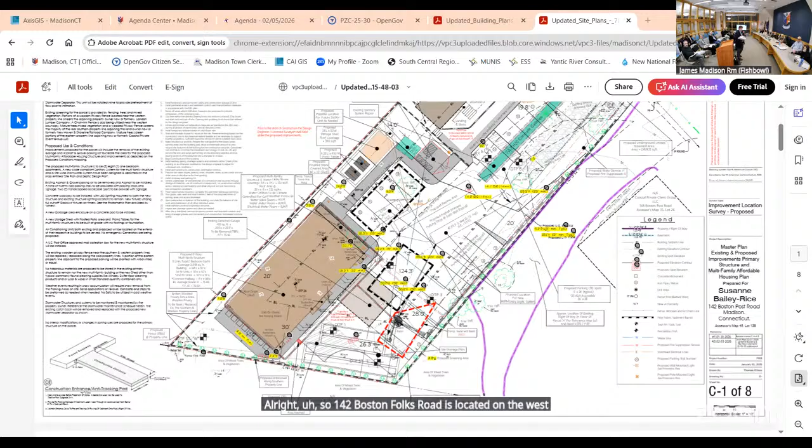All right, so 142 Boston Post Road is located on the west side of town, south side of Route 1, over near Nathan's Lane. It's bounded on the north by the Post Road, on the south by the railroad line, on the west by Land and Lumber, and on the east by another property, I forget, 148 Boston Post Road, which appears to be a commercial property. I couldn't tell if it's mixed use.

It's presently improved with an existing building here that contains a learning center operated by the applicants, and it has a 620 square foot apartment upstairs. So it's a mixed use building. There's also an existing garage on the property in the rear.

The proposal under Connecticut General Statutes 8-30G is to construct an additional building in the rear of the property with 4,500 square feet that will contain 8 new one-bedroom units.

Since the application falls under 8-30G, it requires an affordability component. So including the existing 620 square foot unit in the front building, there will be a total of 9 units. With 9 units, they're required to designate 3 as affordable units, and 6 will be market rate units. We can talk more about the affordability component, but we'll go through the general site plan and have Tom give you further information about septic and stormwater.

The property is served by public water and a subsurface sewage disposal system. Currently on site there are about 10 parking spaces, and that will be improved. The garage is going to be eliminated, and there's a total of 20 parking spaces proposed under your regulations and the Connecticut statutes related to parking.

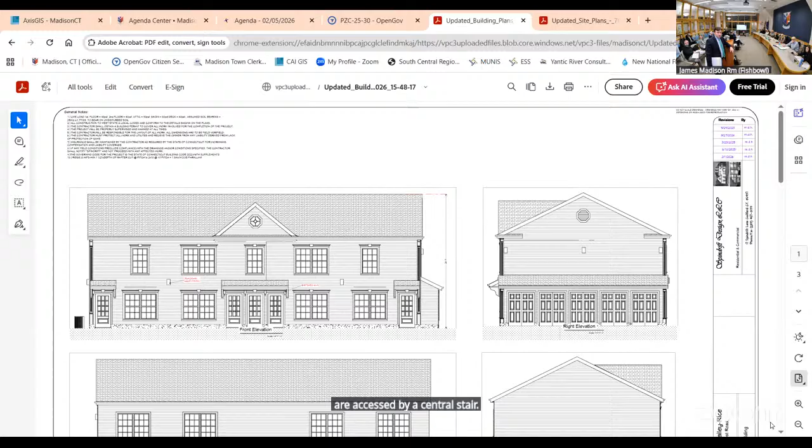So here's the proposed building. The 4 units on the first floor, 4 units on the second floor. The 4 units on the first floor each have direct access without a common hallway. The units on the second floor are accessed by a central stair, which leads to a small hallway that serves the units.

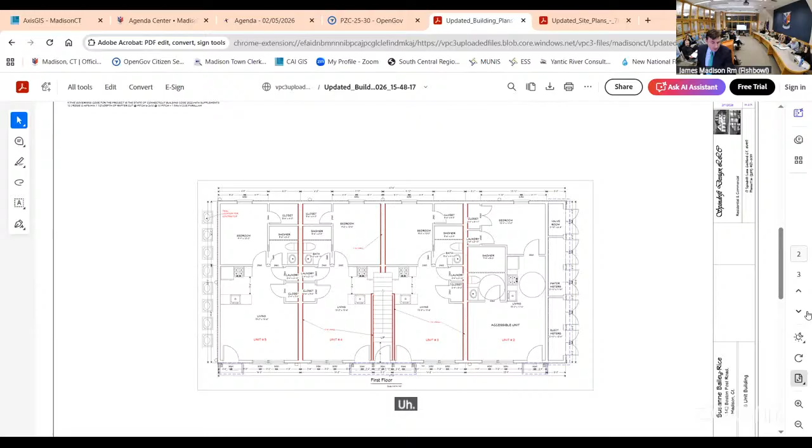Here's the first floor. You can see the 4 doors going into the units. They're 1-bedroom units. There is a designated accessible unit that has the proper circulation, and it's at grade, so it's accessible. Going up the stairs to the second floor, there's a small landing which goes into the next 4 units, all very similar size, 1-bedroom units.

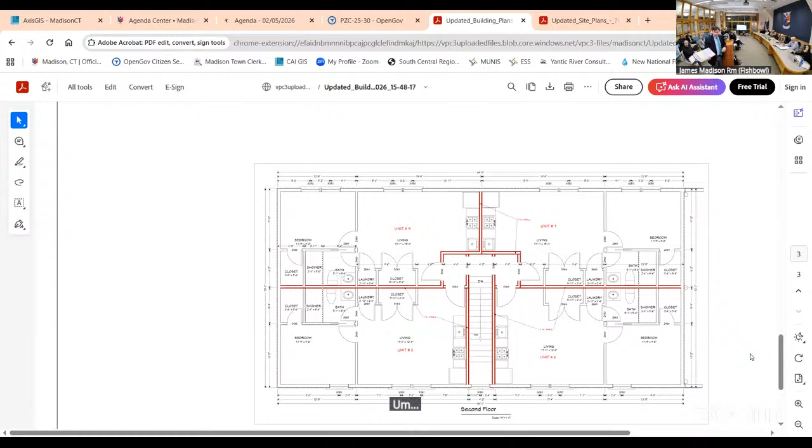On the first floor, there are designated interior spaces for the water meter, electric meters, and a valve room for the sprinkler. This building will be sprinklered. In the rear, these are the HVAC systems that will be on the south side of the building.

We also have a photometric plan. It doesn't need to be shown, but it designates that the lighting is going to be adequate to provide safety for the occupants, so that the parcel is adequately lit.

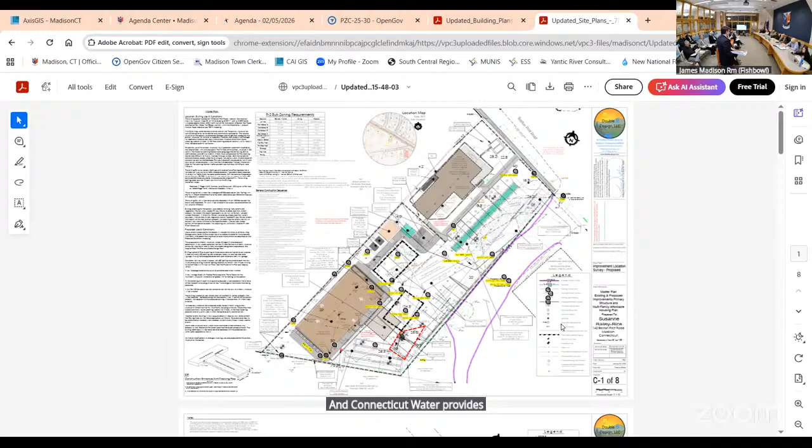We've worked with the utility companies. There are 2 utilities here: Eversource provides power, and Connecticut Water provides water to the property. The Rices have engaged both of those, heard responses, gotten feedback, and are in the back and forth about where the location of the utilities are going to be, down on the eastern side of the property. Eversource is going to require the installation of a new pole on the property, and then underground from there to a transformer. I think you guys can talk about it.

Updates as to the location of the transformer, and then Connecticut Water has also been contacted and has reviewed the site, and we don't expect any problems from a utility perspective.

I'm sorry, do you know where the pole on the property... That's part of the back and forth. Yeah, that we're still, it's not resolved yet. Yeah, correct. I can expand on it. Yeah, go ahead Tom. Tom's been involved in these discussions as everyone. Good evening.

My name is Thomas Wilcox from Double B Design. I am a draftsperson and land use technician for our company, acting as one of the agents this evening, as I've been working with our professional engineer, Thomas A. Smithens, on the project. He's also a licensed surveyor for this project in our office.

Expanding on this particular question, our back and forth with Eversource has been that the existing pole in the state right of way is there, and Eversource is at the moment suggesting or asking us to demonstrate a pole on the property. What they're doing is essentially, instead of what we would prefer - meaning underground to the property line and then a transformer - working out some of the criteria of who would be doing the underground digging in the state right of way.

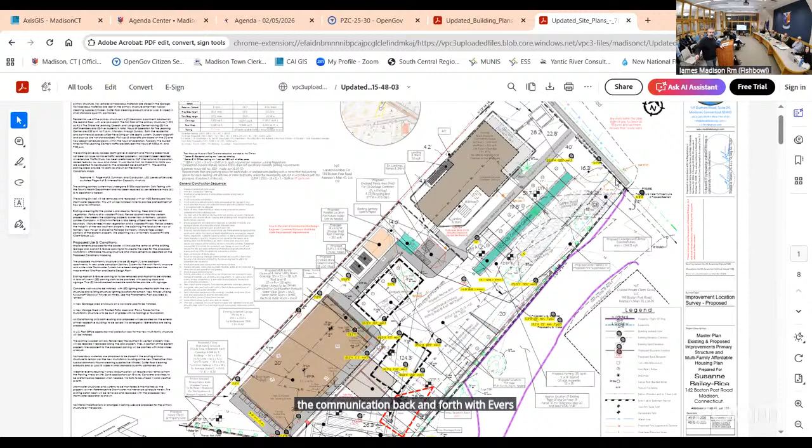It's something we don't feel is ideal, adding another utility pole. It's not something we'd like to do, but it's something we may have to do because we're working that out. The communication back and forth with Eversource is ongoing—Aaron, if I could ask you to go to page 3.

The easement would come in and follow the property line essentially, then take a right-hand 90-degree turn into the utility closet. This would be all underground from the property line to the building. Eversource is fine with that, even with the Connecticut Water two service lines, one for potable water, one for fire suppression.

The building is going to be sprinklered for fire suppression. As the easement comes over and in, it's going to be shared by those two service providers, and both have no problem with that, as long as they can get to the building with our required separating distances.

This map has our metes and bounds, one of the criteria Eversource is going to require for land use records when it goes to final approvals. So these plans, as they are, aren't approved yet, but there are no negative comments received—everything is as they want regarding showing the fire suppression and the distances of separation.

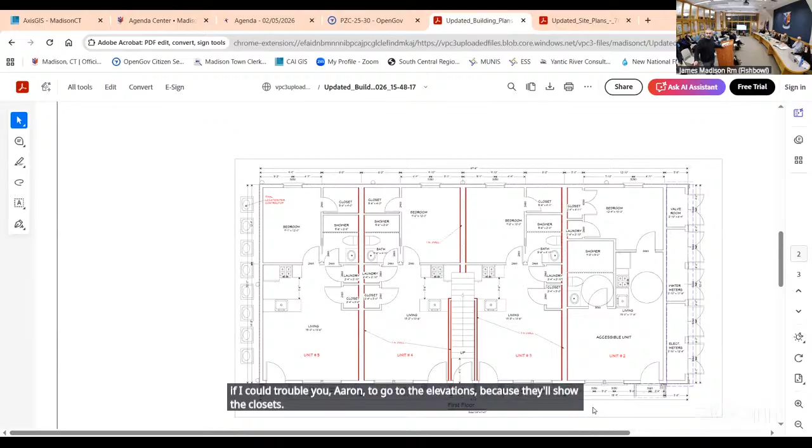The valve room is to be locked and temperature controlled. The meter room is also to be controlled, obviously for freezing protection and for sealing, with the water company only able to get in and out—so no access essentially. What happens to the existing utilities that this fine family already has in place?

They stay—the existing building stays with its own utilities. There will be a new one just for that, correct, the new building will have its own. How will the new building be heated? Electric heat, right? Yeah, yep.

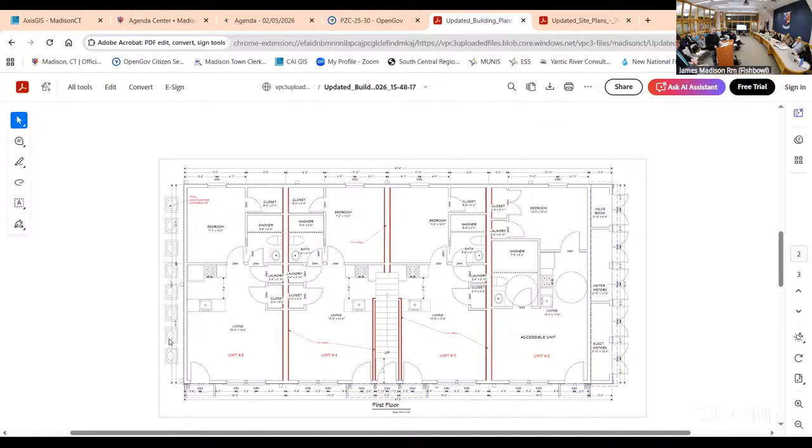And I can further expand on this. Go through your site thing. If I may, we have received comments dated 12/29/25 from a preliminary meeting that we had.

Going down just a touch on the bullets, the owners have confirmed sprinklers will be utilized.

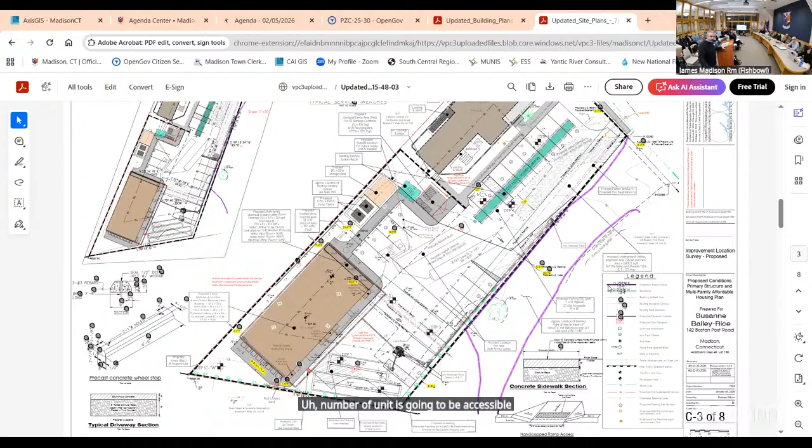The parking for ADA handicap compliance is 1 to 2%, or at least one parking spot, dependent on the number of spots. With the 10 spots we have, we're providing 2 handicap spots, one on either side. The idea being accessible, one for this unit, unit number 2 on the ground floor, which is going to be accessible and compliant for ADA. This spot could assist with any activity in the current use of the building.

Moving on, in regard to the health concerns, at the meeting we did have, at that time we did not have sanitary approval for our plans. Since then, we have obtained health approval. We received that on the 3rd, just the other day.

We addressed the comments from the health department. It is as shown here. That will be our primary leaching field. That will be our tank, and the distribution of the effluent goes through the sewer line into the tank and then to that underground product, which is H20 rated for vehicle loading. It's going to be pavement, and that's going to go into a later topic.

There were notes on the site plan for zoning and development. We did revise our floor areas, and we did update our parking calculations. That's represented on the first page in our zone chart, which has all been updated.

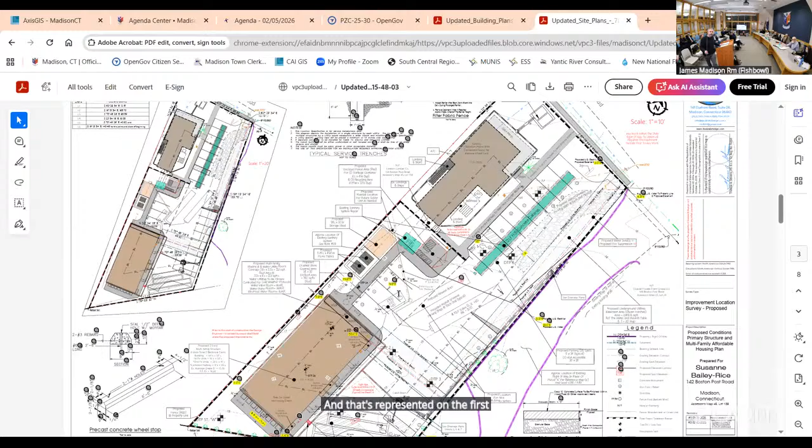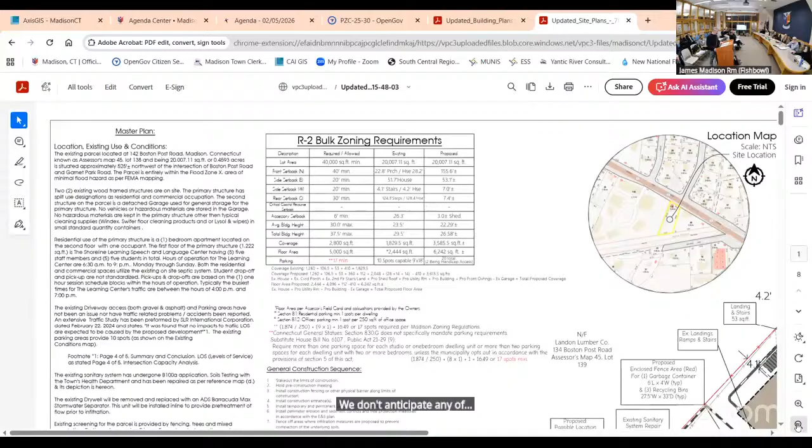We have continued our conversations with the utility providers. They're both going well with no negative comments received. We don't anticipate any negative or adverse timelines, just a matter of completing that.

The gravel driveway that was previously proposed, we have switched to bituminous asphalt pavement. As you come in, park on either of the parking spots here and move down into this parking lot, which will then lead you onto that concrete sidewalk.

It's an impervious surface. We had done calculations for the entire site based on the entire site being impervious. And we designed a subsurface stormwater collection using both a catch basin and stormwater collection for the roof systems. We've also provided the existing structure with its own stormwater collection to grab all of the roof water and bring that into collection to assist with any potential adverse conditions.

The way that the lot slopes, we're doing minimum contours. We want to leave the natural drainage patterns as best as they are. We have excellent soils, even though we're adding an impervious surface. The way everything is going to be sloped and finally paved out, we're going to be able to collect all the stormwater. We're actually above the requirements, on I believe page 5, possibly 6, where we have our mathematics for the stormwater system.

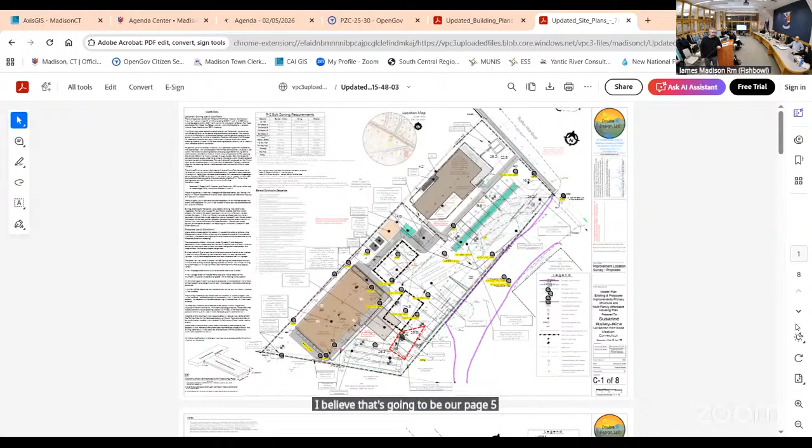Both for the existing unit, we have calculations for the requirement and what we provide, and we are over what would be the minimum. The same on our stormwater sizing, where we would need I believe 1,487 cubic feet of storage, and we're at 1,893 cubic feet of capability. So we're meeting our mark on that.

There wasn't. Go ahead. Absolutely, please do. Where do these calculations come from, and can you speak to treatment as well?

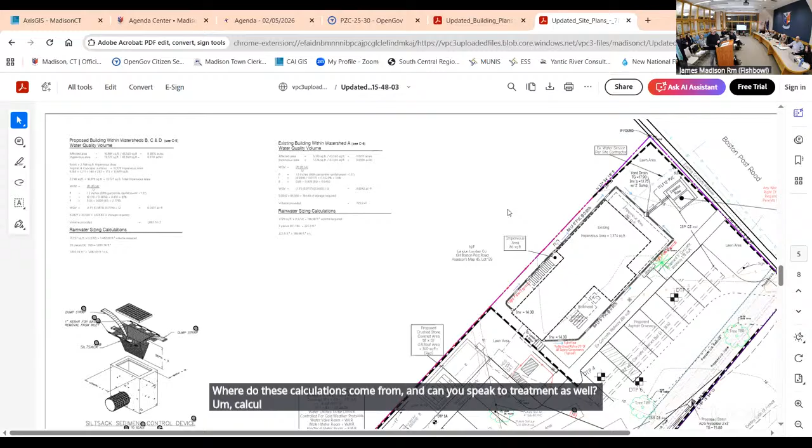Calculations, to my knowledge, are coming from the water quality requirements for our current standards for stormwater. And for treatment, it is subsurface. We're collecting the suspended solids, and what the suspended solids will be doing is they'll be retained.

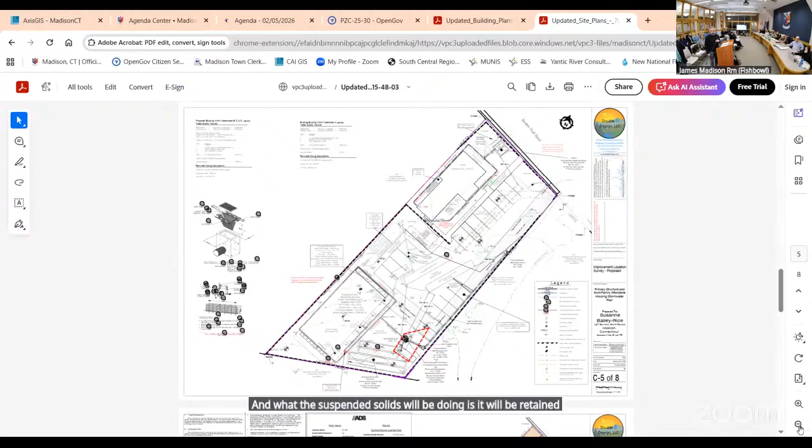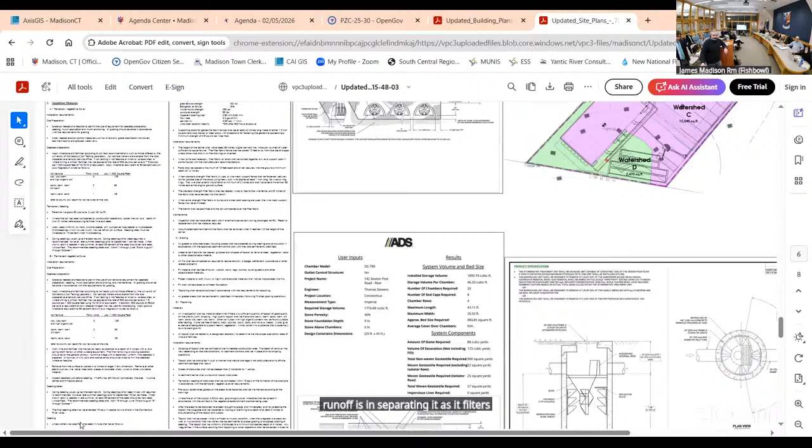If you could move to the next page please, Aaron. So that's the hydrodynamic separator. This unit is going to be collecting runoff and separating it as it filters it out. It's on the bottom of the unit, it's capable of basically a sump.

Solid particles will be able to go to the bottom. It can be vacuumed clean for periodic maintenance, yearly maintenance, just for the longevity and viability of the product and the property.

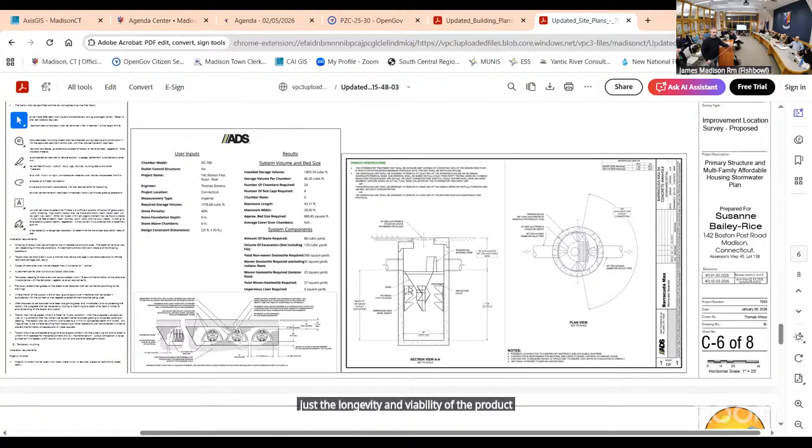These stormwater systems don't separate through cyclonic motion, they separate through sumps as the water would come in. Heavier materials would sink to the bottom, and then the water would flow into the chambers and be retained to allow the ground to slowly absorb that. We've got excellent soils where we are. Again, for the size of the unit and the requirements of the commercial aspect of the multifamily setup, we hit those markers. We're fine for separating distances from the stormwater.

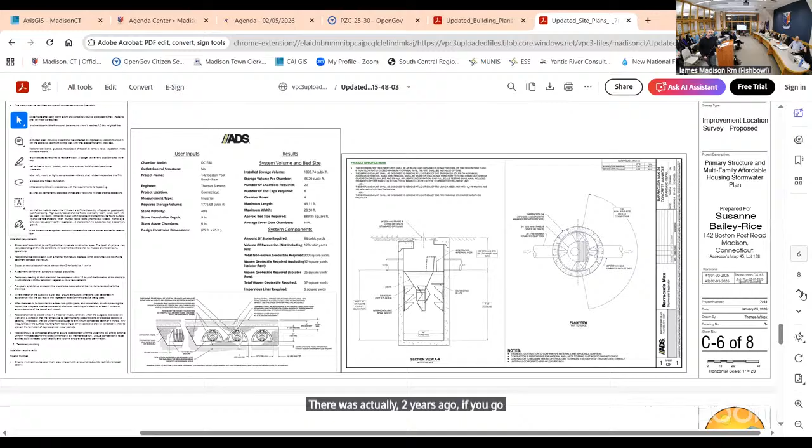There was actually, two years ago, if you go to the second page please, Eric, page number 2 - the existing building, this leaching field and H20 tank was installed about 2 years ago, and it was a full system replacement, and there were no issues. There have been no issues, everything's been going extremely well. So I would say that's a great litmus test for this site, the size of that system and the conditions that it's currently in.

Moving to, we've touched on the photometric plan.

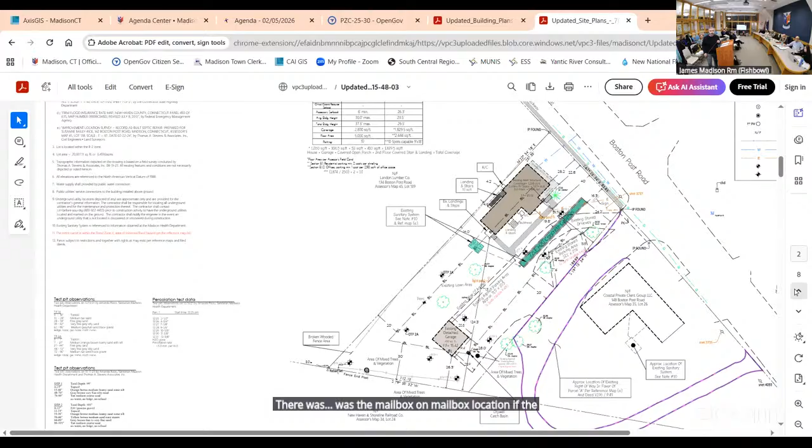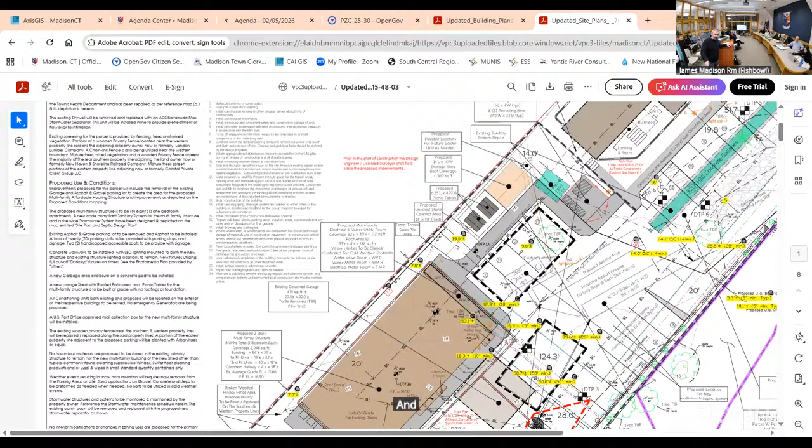There was a mailbox location, if you could go to the first page, please, Aaron. It's going to be, if you could please slide over, in the lower portion. Keep going, there you go. This red box is essentially the location.

The postmaster, to the best of my knowledge, has discussed with our clients that there are several opportune spots they can put it, based on proximity to the building and location for the postal service provider to drop off the mail. This area is going to be a no parking zone, ideal for a postal worker to drive in, park, and distribute the mail in that pedestal cubicle kiosk for the 8 units.

Our first floor elevation is going to be elevation 16.50. That was one of the things we were asked to show. So I've put a call out on the building there, and that particular call out will correspond with the building plans.

We did provide some more spot elevations regarding the topography of the property, just to show and reiterate how the contours are already naturally moving towards this southern adjoiner. Currently within this area is all mixed vegetation and trees and things of that nature. Any catchment from this catch basin is going to be ideal as this flow happens. Any flow from our property is going to be negligible, no different than what currently exists.

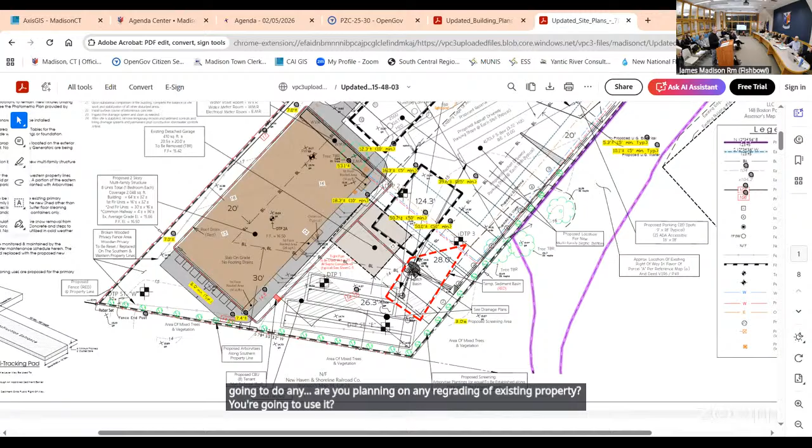Both. There's going to be minor grading. There's a contour 17 that we're going to be catching, and also a grade of 16 that we're looking to achieve. Again, there's this grade line here that follows around - that's 17, and we've got 16. So the contours, I don't want to call it a flat lot because it's not level, but it's an easy

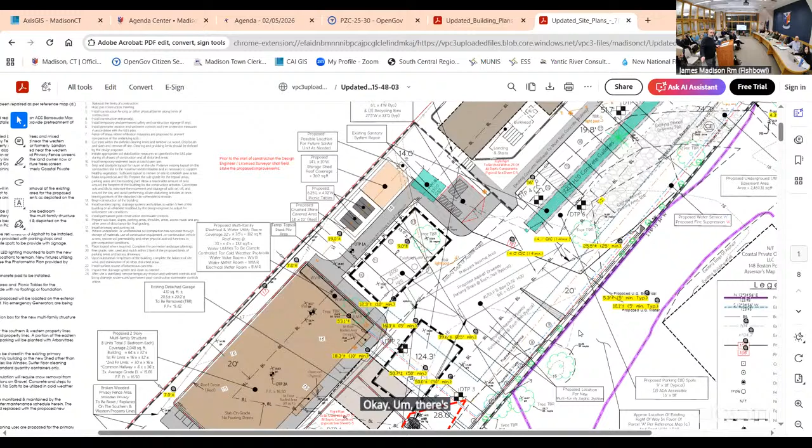sloping property. Okay. There's also going to possibly be arborvitaes along this property line to act as a buffer, and on the southern property line, that will also retain quite a bit of moisture as things progress downward.

You say possibly, does that mean yes? Yes, we are proposing it. I just don't know if it's an arborvitae or some similar product - the plans say arborvitae.

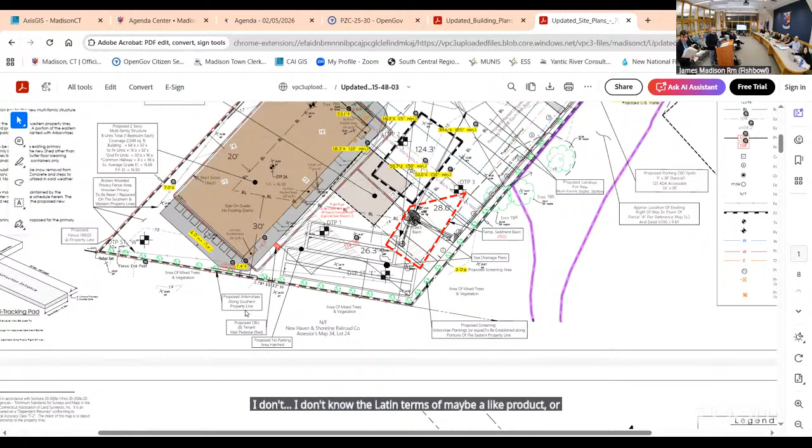Okay, good. But also, how much of a buffer exists between the lot and the train tracks - like a distance from the closest train track to the property line? I do not know that answer off the top of my head, but I could obtain that.

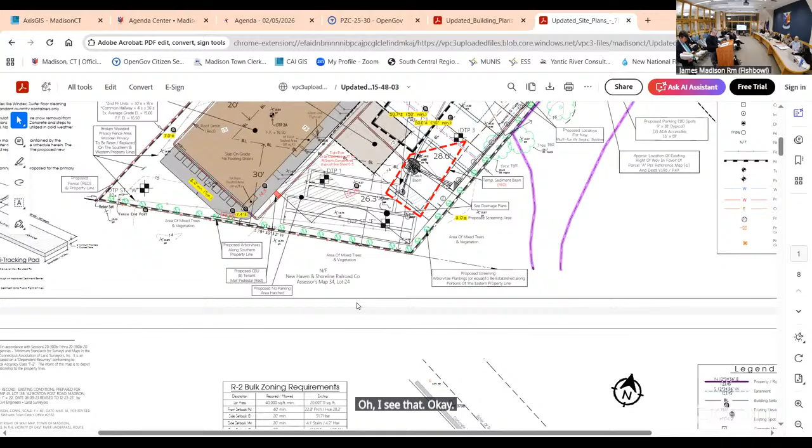Do you want to see the aerial? Yeah, let's take a look at the area and see what kind of vegetation exists, if any.

So that's a road that they use for maintenance. Oh yeah, tracks, yeah, right. That's a road they use quite often. Yeah, and then there's trees, mature trees.

But it's good to have some planting along that. I would agree, yeah, absolutely. It softens it up.

And there's a fence that's going to stay. I think I saw a fence. There is a current fence on the western property line separating Land and Lumber and our subject property. It's been moved a little over the years, with a lift or lumber here and there, so it will have to be reestablished. All right, so that'll be part of the plan. Yes.

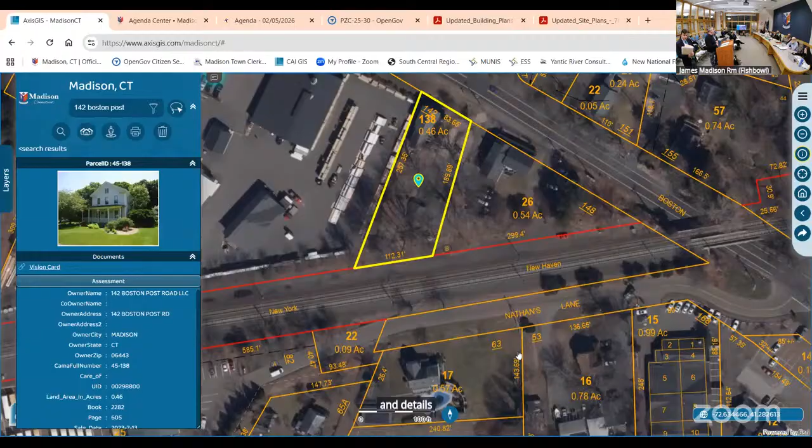And details on the photometrics will be available when? I can share this, yeah.

The only downfall of switching to online permitting is that everything's individual, and it's not as easy to pull up as it used to be when we just uploaded them into a folder.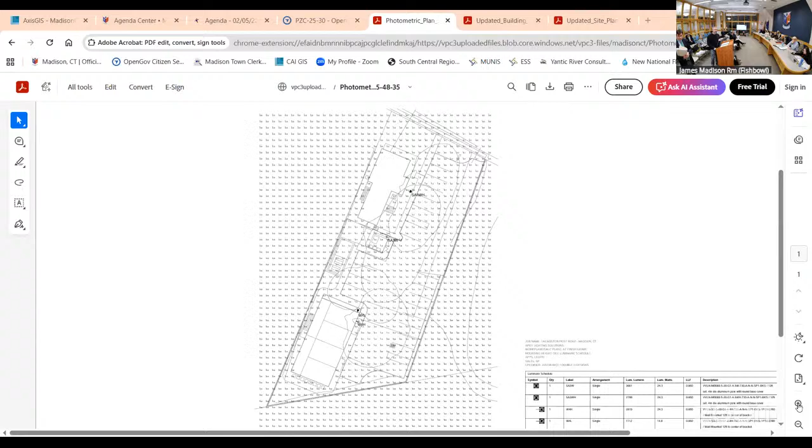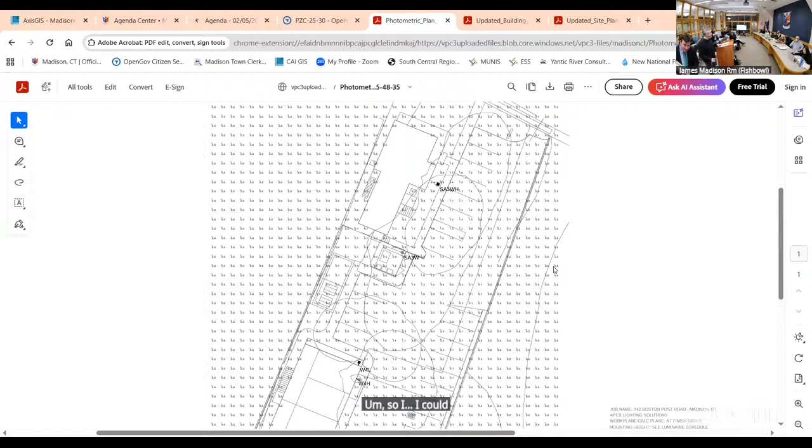And we can zoom in. I know the major concern that the individuals who produced the photometric plan had was light trespass, making every attempt to be as conservative and respectful of neighbors given the plan. I am not an electrical engineer, nor have I stayed at a Holiday Inn in a long time, so I could not adequately decipher this to the best of my knowledge.

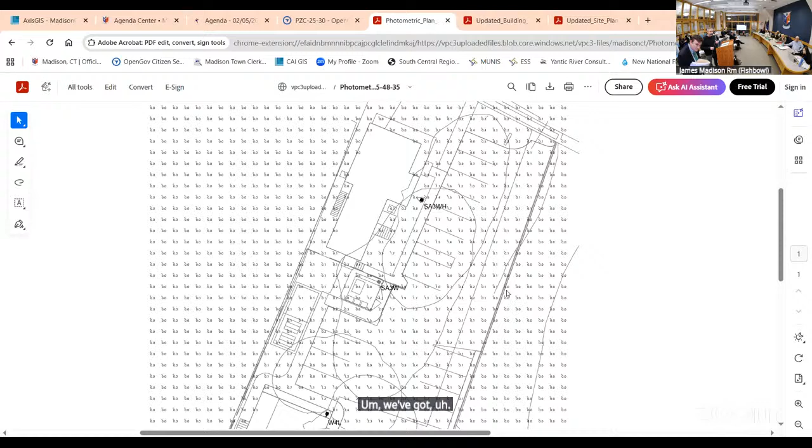These are the light transmittal diagrams, and it's catching the parking lot, not exceeding the property line. I believe it is a low value, around 0.1. We've got minimal lighting, it is LED, it is dark sky compliant and/or downward facing. The idea was to be adequate for safety but also respectful, especially to the eastern neighbor. You can see here the slight overage—that's basically the only spot where it goes over, and it's 0.01, which is not a light trespass.

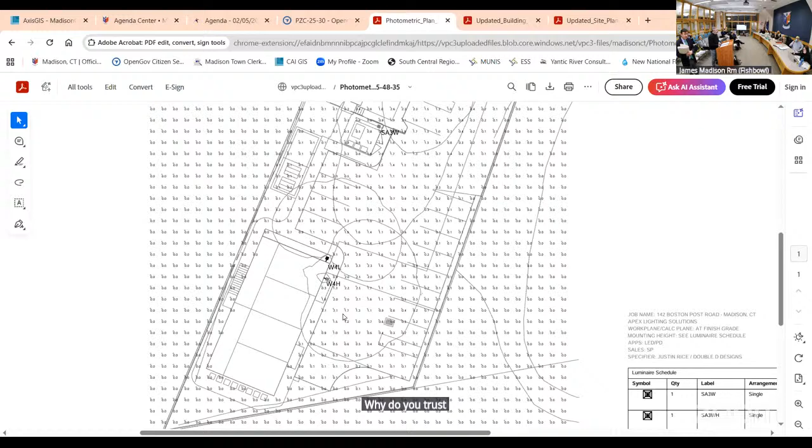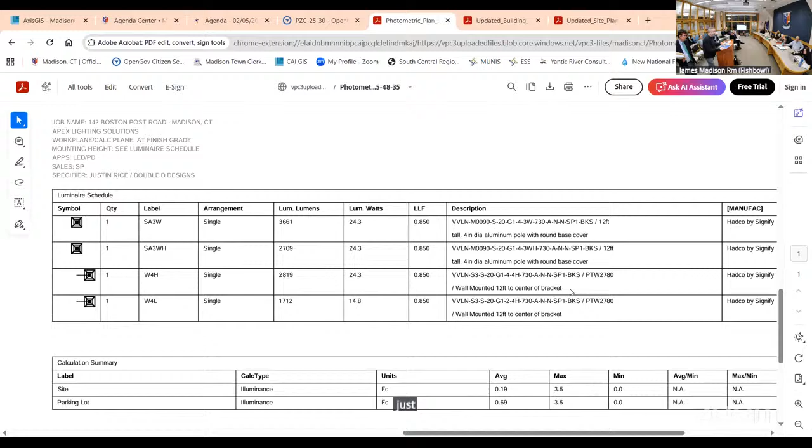I tried to grab at least a depiction for the commission, if you guys want to pass this around. That would be the version of that LED fixture and the way it illuminates downward. To my knowledge, it's the same fixture, just rearranged off the pole onto the wall.

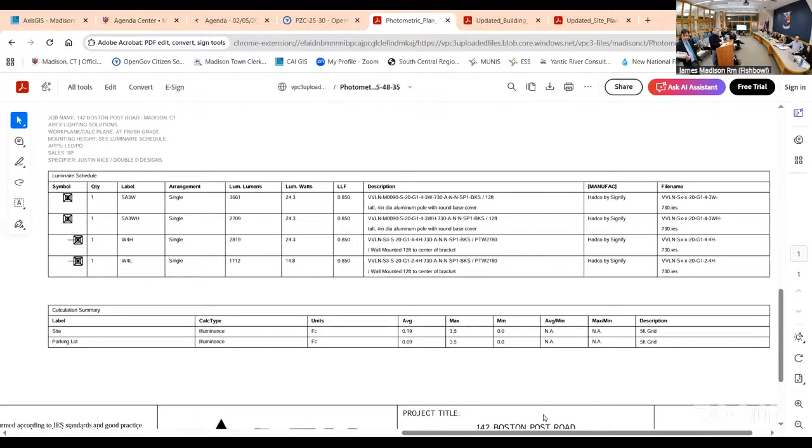Moving on, if everyone's okay with that—innovations, we did add an 8th sheet for erosion and sediment control. If Aaron could, go to the 8th and final sheet of our site plan.

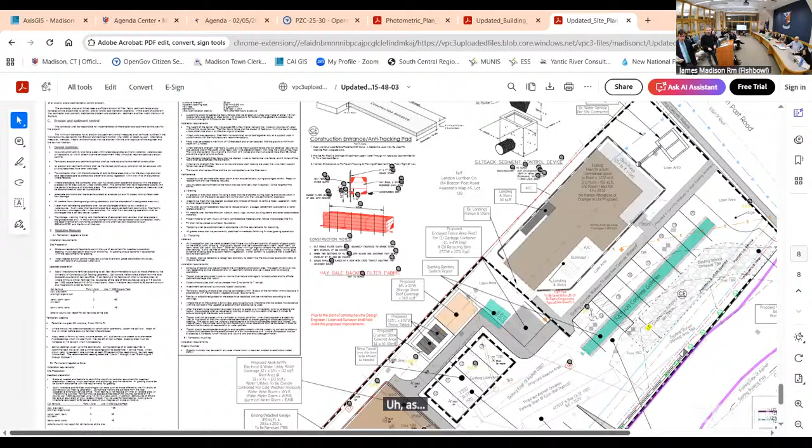As construction begins and is underway, we have 2 locations for possible stockpiling in the event that the site contractor or contractors need to stockpile earth or anything else they're generating. Those 2 temporary locations would move and be set up as needed. Since I drafted that, I've had conversations with our client and the site contractor, Archie Bailey, who already worked on the property and installed the existing septic system in the front of the existing building. He plans on doing the same process he did before—as he generates materials, he wants to remove them off the site. The site's very tight. If he does have a stockpile, it's going to add another hurdle.

Something to try to get around or through, or something that could be a potential adversity for him. So his goal is, as they're grading and doing whatever they're doing, to take any materials and bring them off-site to store them in a more efficient fashion, both for his workers and for any adverse conditions that may happen.

In regard to limiting potential adversity, we're proposing a temporary sediment barrier around the existing catch basin. The existing catch basin is essentially a dry well—as water moves into it, it collects, rises, and the ground absorbs it. We're going to try to utilize that for as long as we can and put in our separator at a time that's best for the site in the most efficient manner. That way we're collecting sediments and retaining stormwater as we go, without putting inefficiencies on the construction end of things, so by the time this is all wrapped up, everything will be functioning and ready to hand over to occupants.

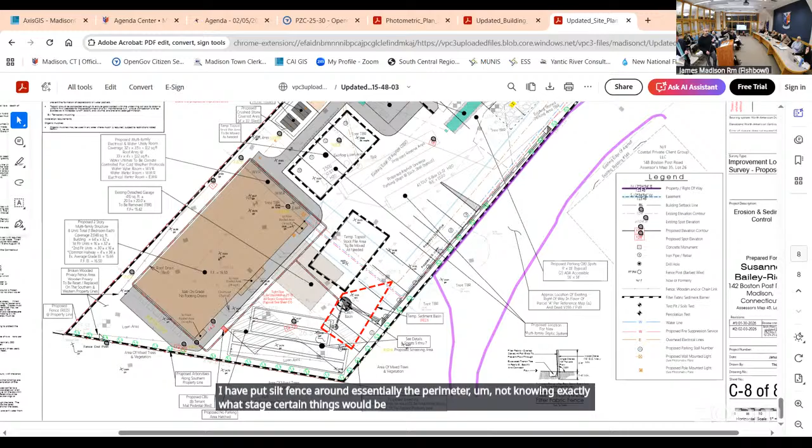Go ahead—are you proposing silt fencing or filter? Correct, I apologize if unclear. I've put silt fence around essentially the perimeter, not knowing exactly what stage certain things would be done at. As a preventative measure, we've applied silt fence. That's the best practice, in my opinion, to potentially curtail any erosion and/or sediment buildup—it's one of the least expensive and most effective ways of doing it.

As conditions occur, storm events, regular maintenance will occur. The project can't start, based on our sequences, until it's been permitted by a review of the silt fence—meaning until these erosion control measures are in, no construction will be allowed to commence.

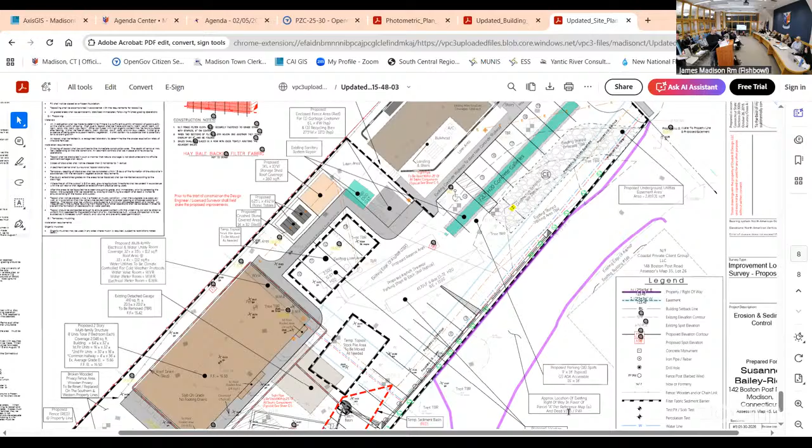Did I omit anything, Ed? I think that's fairly comprehensive.

I haven't talked much about the affordability plan, so I'll review that briefly. As I said in the beginning, under 8-30G, 30% of the units must be affordable and deed restricted for a period of 40 years. These will be rental units, so owners will continue to own the building and rent to tenants. Using 2025 numbers, 2 of the units will be affordable for individuals making 60% of the median income, with rent of approximately $930. One unit will be rented to individuals making 80% of the median income, calculated at $1,180. These numbers change every year as the median income of the area and state fluctuate, but that gives you an example, and we provided the methodology in the affordability plan.

I don't know if there's any questions on anything, but that's our presentation.

I have a quick question about your short statement of use. I think there's typos or something missing, because it says one of the 3 units will be affordable to individuals and families making 60%, which doesn't seem to match your longer document. Two units are 60% and one is 80%. So to be sure: 3 affordable units, 2 at 60% and 1 at 80%. That's how the affordability plan reads, the longer plan goes into it, and that's the one that gets filed on the land. Good, I just wanted to make sure this wouldn't be a problem at any point since it's a discrepancy. That sounds good, thank you.

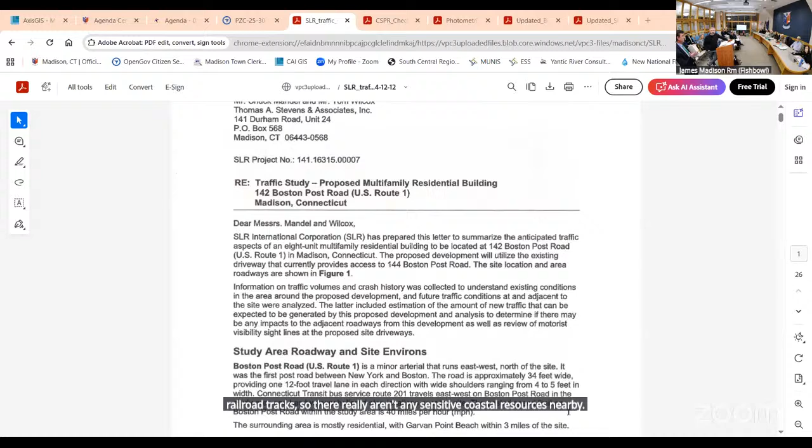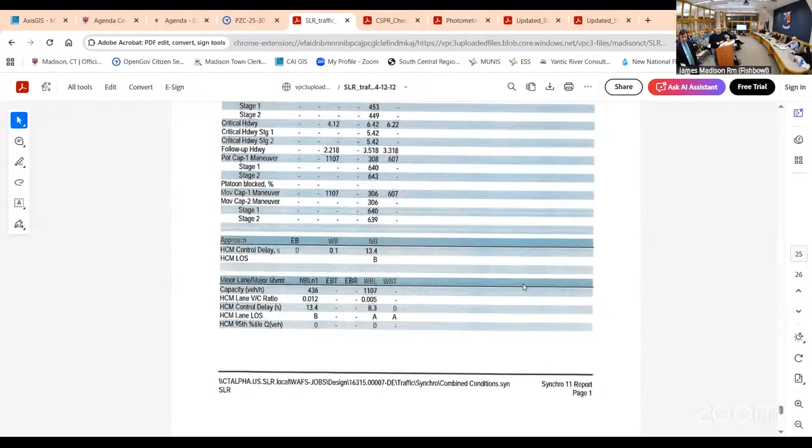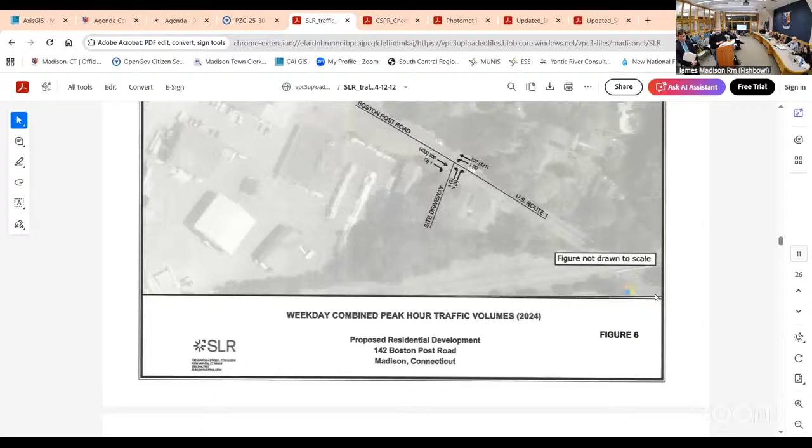Would you like me to skip to the summary page? That would be fantastic. Oh, of course, I hit the appendix, I'm sorry. That was quite all right, I went too far. There were counts. Keep going, it's probably page 4. I blew it. Here we go, there it is.

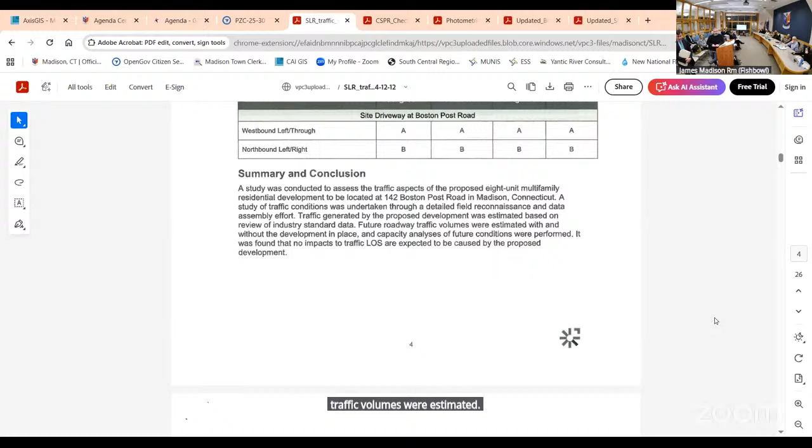In regards to the summary and conclusion, as it states, the study was conducted to assess the traffic aspects of the proposed 8-unit multifamily residential development located at 142 Boston Post Road in Madison, Connecticut. A study of traffic conditions was undertaken through detailed field reconnaissance and data assembly. Traffic generated by the proposed development was estimated based on review of industry standard data. Future road traffic volumes were estimated with and without the development in place, and capacity analysis of the future conditions was performed. It was found that no impacts to traffic levels of service are expected to be caused by the proposed development, and that was provided by a third-party engineering firm.

Thank you. Well, thank you.

We did receive, it was not a mandatory referral to DEEP, although staff did send that up since it seems to be the practice of the commission. That checklist was returned from DEEP's analyst as well, again indicating no adverse impact to the coastal resources. Great, so that's on file.

Any other questions or comments from commissioners or from the public? State your name and address, wherever you are, as long as we can hear you. My name is Michael Mullane. I live at 64 Middle Beach Road West.

Nice presentation, it looks very well thought out and designed. I have questions and I haven't looked closely at the plan, so they could be there. You mentioned the heat, you said electricity. Is that a high efficiency heat pump or regular? A heat pump, great.

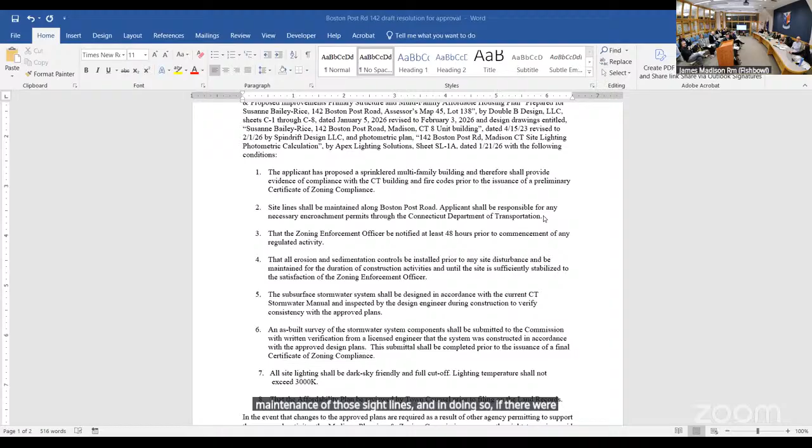Number one, because the applicant is proposing a sprinklered multifamily building, they shall provide evidence of compliance with the Connecticut Building and Fire Codes prior to the issuance of a preliminary certificate of zoning compliance. The second is a note I saw in the traffic report, to maintain sightlines from the driveway, and if there were any requirements for encroachment permits with DOT, the applicant be responsible for those.

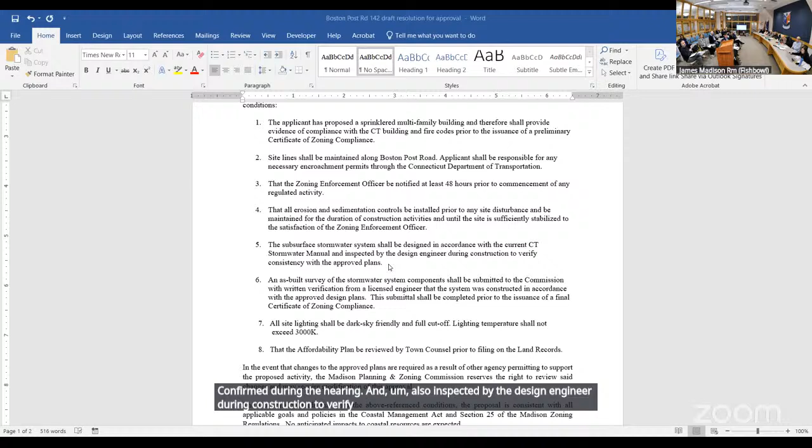Some of these are our standard language for site plan approvals: ZEO notification at least 48 hours prior to commencement of any regulated work; number four, the E&S controls, which also assists in the coastal site plan approval; and fifth, the subsurface stormwater system shall be designed in accordance with the current Connecticut Stormwater Manual, which the applicant has confirmed during the hearing, and also inspected by the design engineer during construction to verify consistency with the approved plans - that's another standard condition. And then for the as-built survey, I'd recommend changing this so that a final as-built survey, including the stormwater system components, shall be provided.

To the commission, that typically goes to the zoning enforcement officer prior to the issuance of a final zoning compliance. Also includes written verification from the licensed engineer that the system was constructed in accordance with the approved design plans.

I did note that the lighting shall be dark sky friendly, full cutoff, which it is proposed, and lighting temperature should not exceed 3,000 K. I didn't see in your drawings that it said 3,000 K, that the lumens were in, there are details.

This is typically a recommendation that comes from ACA when you receive site plans, and typically is included in all of your approvals. That should be there by site plan default. Yes, can be, you have used this, and it is pretty standard.

Most all of these LEDs now have a range of 3 settings, 3,000, that's correct, 4,000 for the lighting, and they're all adjustable. So they just set them to that darker, or that more yellow color, exactly.

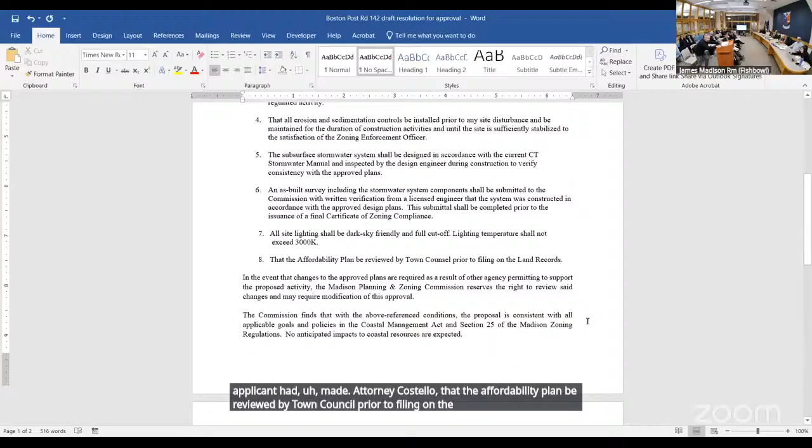And then this was the note that the applicant had made, Attorney Cassella, that the affordability plan be reviewed by town counsel prior to filing on the land records. That is standard. Even if it's not, we tend to have that final review.

This language, in the event that changes to the approved plans are required as a result of other agency permitting to support the proposed activity, you reserve the right to review the changes, and may require modification to the approval. So that speaks to some of these outside agencies, like the fire marshal, Connecticut Water, or Eversource, if they throw a wrench in the proposal and say that something has to now go on the opposite side.

And then this language: with these above referenced conditions, the proposal is consistent with applicable goals and policies in the Coastal Act, and no anticipated impacts are expected. And then lastly, is to include an effective date, which would fall after the notice of action in the newspaper.

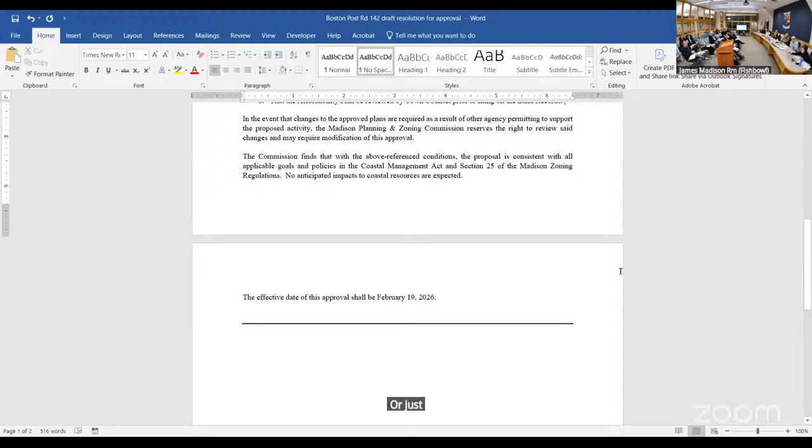Or does the number 8 need to say reviewed and approved by town counsel, or just reviewed? Ultimately, the attorneys would provide any recommendations for commenting.

How would you like to word it and that? Approved? It's approved. Okay, let's not get fancy.

I did read through the affordability plan and it's pretty boilerplate. Yeah, that's what I thought too. At least all the numbers and the calculations and everything are correct. I don't have a printed copy, but you're welcome to motion.

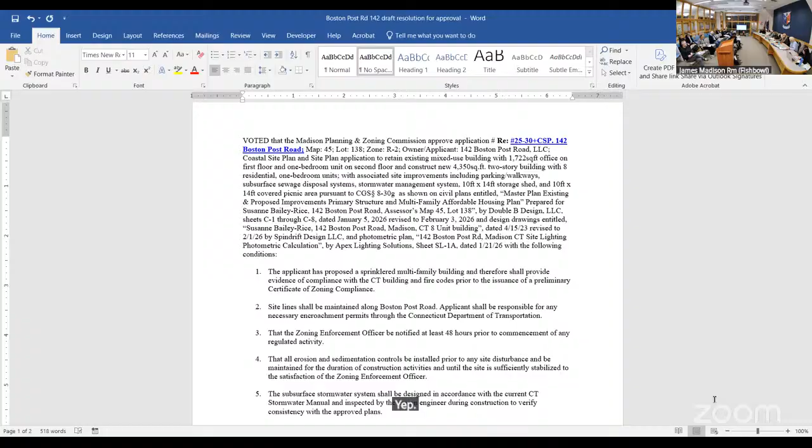All right, next on our agenda, we have a continuation of the public hearing, which was opened at our last meeting, January 15, 2026. This is number 25-28, Bushnell Lane, map 27, lot 87-3, zone R2, owner applicant Linda Tass. Re-subdivision application to legalize division of property from 1957.

I think it's the same attorney. Yes, it is, the same attorney. Does anybody need a break? Thank you, Jess, I'm fine. You need water? Yeah, I drank what I had.

All right, good evening again, Ed Cassella representing this application for subdivision. We spent a lot of time last month, I guess it was at this point, reviewing this. Erin and others did some digging and found a few things, so I have a few additional opinions I would like to provide regarding this application.

So, put together a little letter that kind of outlines a couple of interesting things, dated today. I can give some context, I guess, for Carol, if you'd like. Sorry, can you guys go over that for me, or synopsize it?

We kept the public hearing open because I felt that we had a lot of information coming to us about a relatively complicated and historic division of a lot. That's correct. And so I wanted a chance to go back to our current regulations. I also took the opportunity to go back to the 1950s and 1960s regulations to see what was in effect at the time of the division.

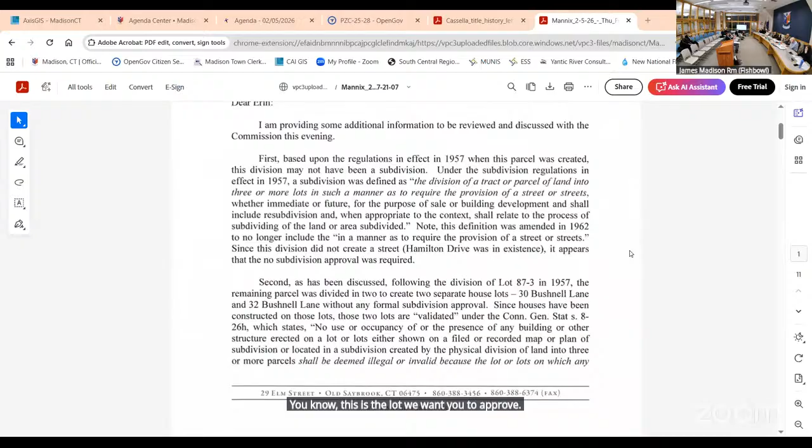But it makes an interesting point, which is one of the things we argued here when we were trying to get this lot approved: this is the lot we want you to approve. And if those lots are already legal under the statute, that's what you're doing, right? You're basically just saying this lot is an approved building lot. And you have the authority under 8-26, which is kind of your primary authority, to approve plans even if they've already been made, even if the map's already been filed, even if it's already been done.

The statutory language is in there for this commission to be able to do that. So, a couple of different angles - my preference would be to have the commission approve it, so there's less ambiguity regarding the definition of subdivision. And I believe you have the authority to do that.

Ed, can I just ask a question, because I'm kind of out of this, but it sounds like 30 and 32 are legal according to this. Yeah, yep, that's my conclusion. They've been validated is the approved term, so they are not to be deemed illegal, because the statute says, hey look, there's a house there, so you're okay. Okay, and that's only because there was a building permit approved to make this, and built by the town. Okay, yeah, that makes sense. So that is good in my opinion.

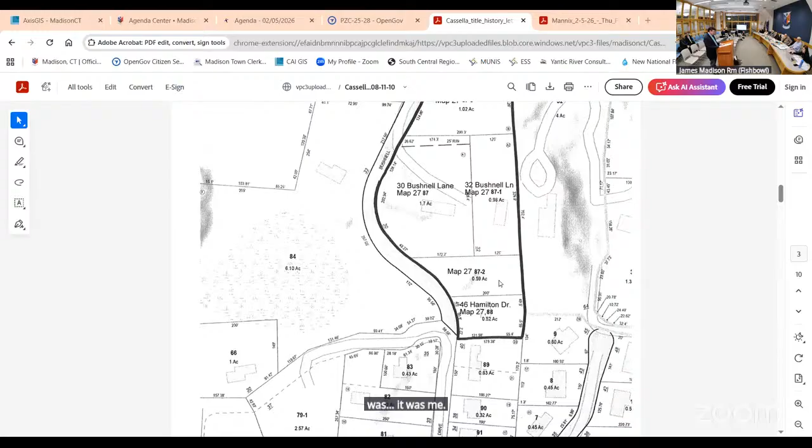One thing I wanted to note for the commission as well - I had looked, trying to find some history of when these permits were pulled, to see if there were zoning compliance issues or any variances on the land back in the 50s. Certificates of variance weren't required to be filed on the land record, so I took some time to look through the minute books for ZBA and P&Z to see if this had come up before. I looked under all of the property names referenced in the maps provided by some of the abutters as well as Attorney Cassella. I did not find anything. There were some things from Arthur Williams, but apparently he owned the Dolly Madison as well back then, which I didn't know. So there were some things, but nothing regarding this parcel. I did then look through our historic land use department records, commission approvals, applications to either ZBA or Planning and Zoning Commission.

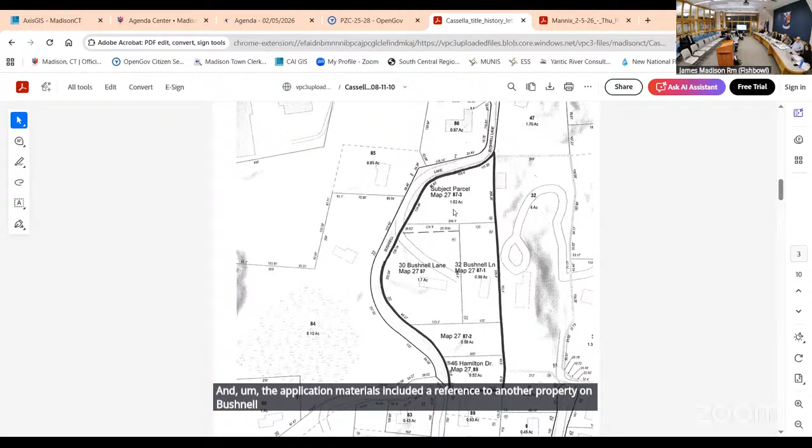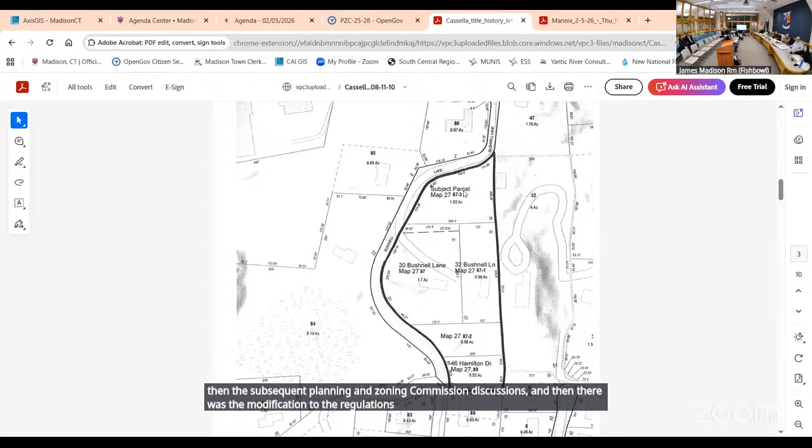Okay, but that was confusing as well. I also thought it was called Hamilton Drive in one document or in the discussion. Yes, it's still called Hamilton. And I thought, why are they worrying about the southern part when in fact Bushnell Lane was Hamilton Drive?

Actually, 30 Bushnell historically has land use records and microfiche as 836B Boston Post Road, I believe. So some of these actually had Boston Post Road addresses because of that driveway, that private road.

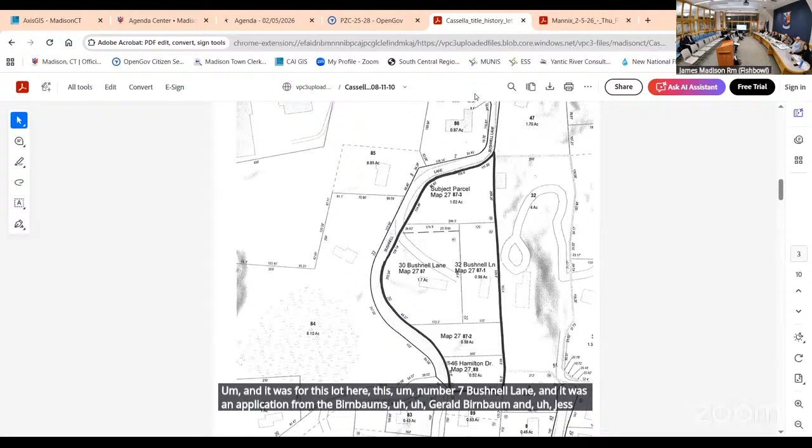So the basis, I did go back and pull the other variance application for Bushnell. And it was for this lot here, this number 7 Bushnell Lane, and it was an application from the Birnbaums, Gerald Birnbaum and Jessica Littell as co-trustees of a trust.

And the application was to ZBA. It was in May of 2004, and it was to legalize this lot as a building lot. And the application materials, the hardship that was referenced for that application noted that the lot was created in the early 1980s and speaks to a history of

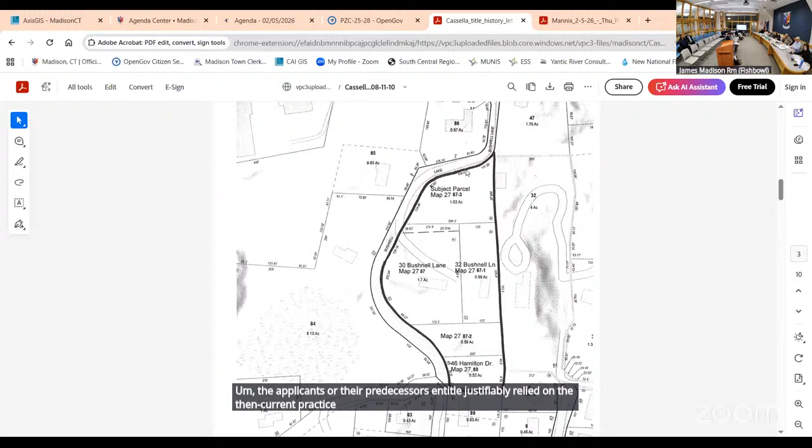the town acting in accordance with an opinion from its counsel at the time, routinely approved serial lot divisions, which resulted in the creation of 3 or more lots out of a single parcel in apparent conflict with 8-25, the subdivision statutes. The applicants or their predecessors in title justifiably relied on the then-current practice in town and divided the property as part of an overall estate planning process. It would be singularly unfair for the town to now reverse its earlier position to the possible detriment of the applicants.

And looking at the minutes from that meeting, there were neighbors attending, residents of Bushnell Lane, including the property owner, Arthur Williams here, and all in support of legalizing that open parcel as a building lot. It's a long driveway servicing roughly 12 acres of land.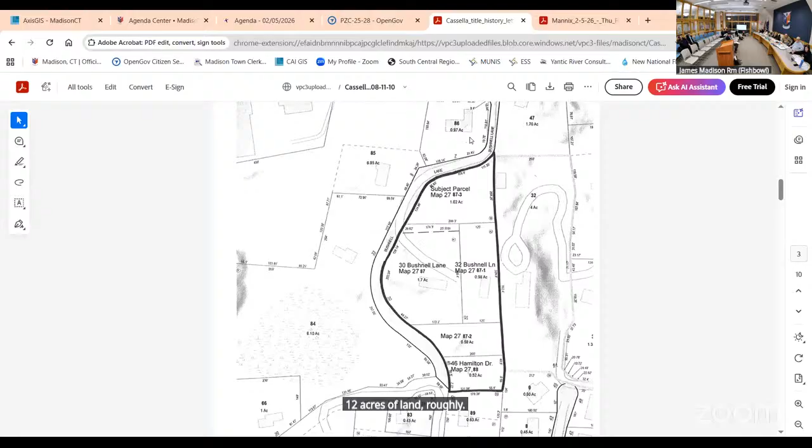And the board ultimately approved this lot as a building lot without frontage. It never went through a subdivision process, but I believe that was the legal argument that Ms. Dyer was looking to make prior to the next step.

Zoning regulations being amended regarding the frontage. So, the more we look into some of the historic records in this area, you can see that there were divisions made in this neighborhood that may not have had subdivision approval. Some of them were legalized by the Zoning Board of Appeals.

Attorney Cassella is now looking at the planning statutes to legalize this lot as it existed on those maps. But it's a very interesting, unusual history in this area.

So what year was that you're referring to? 2004, it was 20 years ago. All right, so question: in 2019, your client needs to go through planning and zoning commission to change the regulations in order for it to be possibly a building lot.

Correct. At that point, she received notice that she needed to get subdivision approval too, correct? That's my understanding, right. And it didn't. So the question is why? Why is it coming up now?